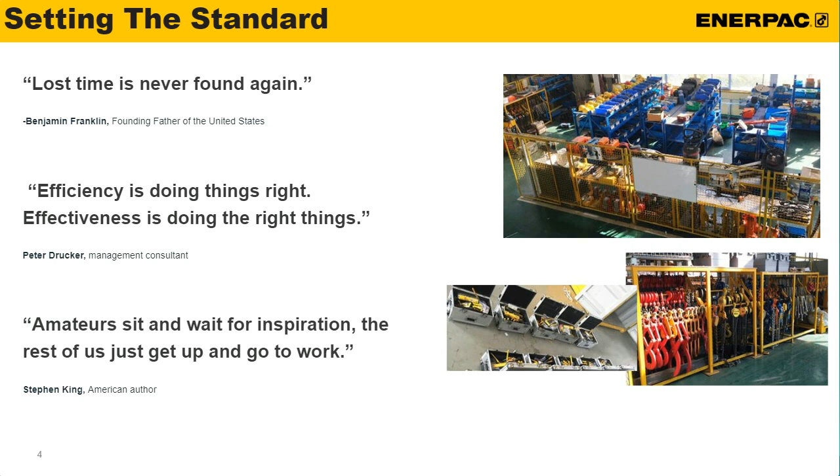We are about getting tools into our hands, getting out into the job site, and keeping all of our assets working in top performance, whether that's in power gen, oil and gas, or general manufacturing or infrastructure. Any of the industries, it's about getting up and going to work. And coming off the pandemic times, we're all leaning into that and looking to progress our industry forward, get back to work, and take care of our assets.

So we're going to start by talking a little bit about the technology trends in industrial tools.

Another thing I like to do in presentations is bring in our consumer lives and try to mate it with our industrial professional lives. As we interact with our day-to-day companies, be it a grocery store, a gas station, or Amazon.com, we feel a day-to-day presence where technology continues to improve, whether that's a phone app, email-based feedback, emailing receipts, tracking numbers for shipments, proof of delivery—all those things we experience every day in our consumer lives, we want to bring into the professional world and apply that efficiency to our industrial tools and how we do business.

We start out with industrial tools that are there to do a specific job, and it started out, as we all know, just getting the job done. Throughout this presentation, most of my background is in bolting—torque tools and tension tools. But I want to be sure we can apply these theories in practice to any industrial tool out there. At Enerpac, we do lots with lifting cylinders, pumps, power packs and things like that. So I'll use bolting tools as a reference, but know that when I talk about innovation and technology, it applies to all industrial tools out there, from Enerpac and any other supplier, as we try to create the best tool experience for you, the end users.

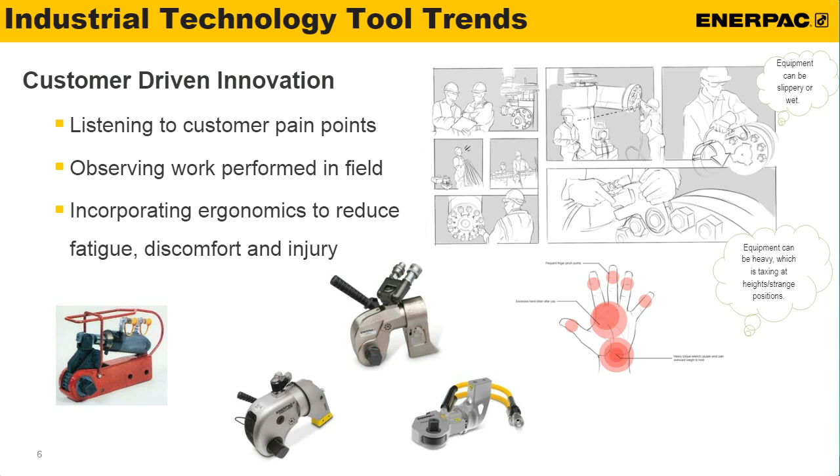Another way we're trying to enhance the use of tools out in the field is this long arcing shift as we go from corded products to cordless products, or said another way, introducing battery tools. Going back to my own consumer life, I remember having a corded drill plugged into the wall to drive stud screws while building barn walls. When battery-powered drills came out from Porter Cable or other large tool companies back in the 90s, it made a huge difference. You weren't lugging around extension cables, you weren't eyeing up the closest outlet, and you had a given runtime. That shift from corded to battery-powered or cordless technology has been tremendous.

Starting on the consumer side, it's absolutely making its way into the industrial world, and Enerpac certainly wants to be a large part of it. We've made battery-powered pumps, hydraulic power units, battery-powered hydraulic torque wrench pumps, and we also have battery-powered cutters for chain cutters.

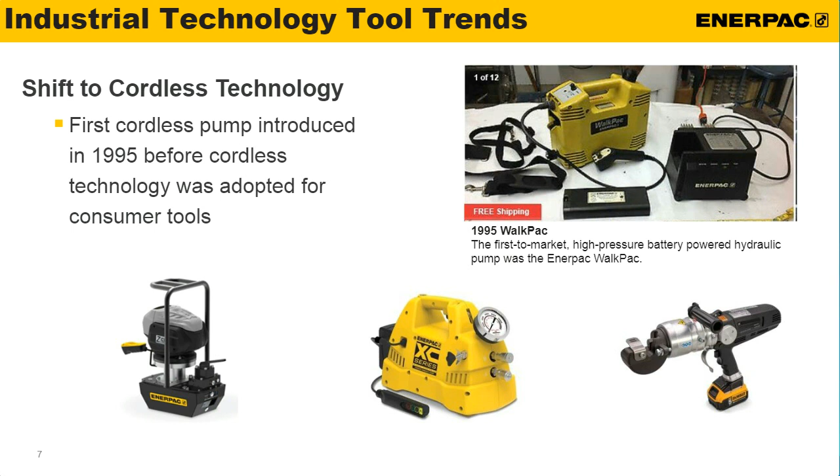Another area where we are innovating and bringing in technology is on the remote control side. We're all used to pendants operating hydraulic pumps—that's been the industry standard for decades. Wireless pendants are slowly starting to take hold, but we have a number of areas where we have to use caution to make sure we don't give up any site performance. We can't have any communication issues or a lost Bluetooth signal in the middle of a job site—there are too many safety risks at hand.

As we move into wireless pendants and more remote control technology, the margin of error is slim. The burden of performance is very high, and we take that at the top of the list as we try to innovate our controls and tools.

In our consumer lives, if you have a cell phone that's Bluetooth into a speaker and it cuts in and out every once in a while, sure, it's a little annoying, but you're still going to enjoy your music with a little interruption. In a high force lifting circumstance where we may be lifting hundreds of tons or controlling 10,000 PSI hydraulic torque tools, we cannot have that miscommunication. We need to make sure that the connectivity is high, consistent, reliable, and that every bit of technology works into that to ensure safe operation on the site.

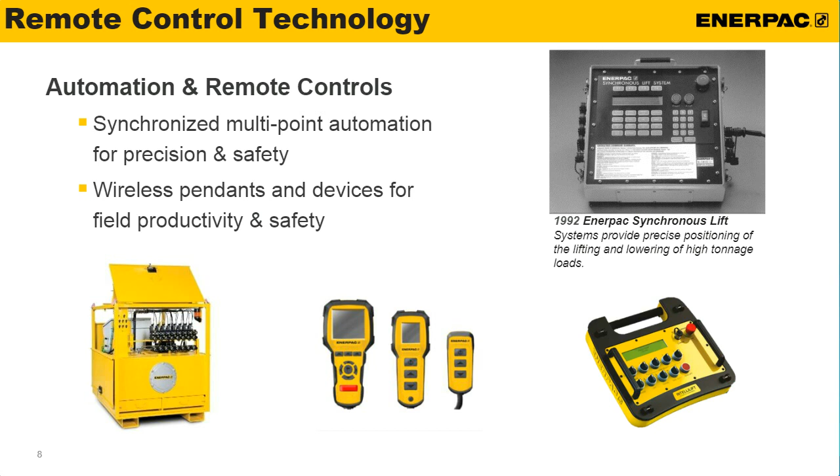Another frontier we've been hearing about in our consumer lives for the last 5 to 10 years is the cloud. Everything gets stored in the cloud, and you have major consumer companies like Amazon, Google, and others creating cloud-based storage. We're absolutely going to be bringing that into the industrial tool space, and it already is there in some capacity. Think of owner's manuals as an easy example of being cloud-based.

We still want to have paper versions available, but having digital copies where we can update and make improvements to our tools over time, over the air, as they say—the OTA side—which they can already do on cars and other types of tools.

As we get into cloud-based technology, there'll be more interface between the end user and the tools you're using, and the documentation we're capturing—whether it's a calibration certificate, a maintenance interval, or a training video. We're going to build all of that technology into the palm of your hands.

The same way you check in for a flight and use the boarding pass on your phone, we want to bring that same convenience and technology into the industrial tool space. Some of this is already available, but we have to be sure we're always innovating and improving.

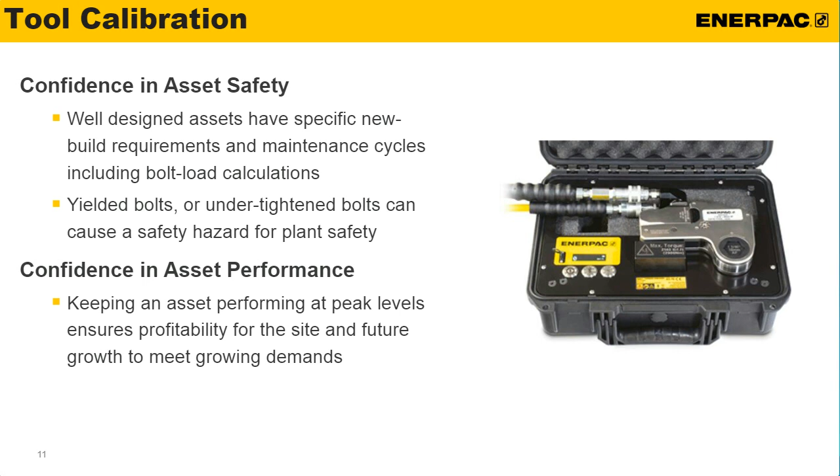So the importance of tool maintenance. This is where I talk about tool availability—the tool is ready to perform the work.

So if you think about a vehicle, we want to be able to walk outside of our house, put the key in the ignition or use the engine start button, and drive to work and go about your day without having to worry about whether the battery's charged, without having to worry about any type of mechanical issues.

So we perform vehicle maintenance. If a vehicle is going to sit for a long period of time, we put it on a battery tender. If we're driving excess miles, we have our oil changes every 5,000 miles or whatever the vehicle is calling for. That's all about maintaining that vehicle so that it gets you to and from work, to and from vacation, to and from family events, when you need it, when you want it.

It is just as important, in fact dollar-wise more important, I would say, to have that same readily available status on all of your maintenance tools.

So if you have pumps that are not available, you're going to have to purchase more pumps to create the availability by having excess pumps. Whereas if we can get these industrial tools into a regular maintenance cycle—and that's going to vary dramatically between what the tool is, how the tool is used, and in what environment the tool is used—that will set the rhythm for what the proper tool maintenance is going to be.

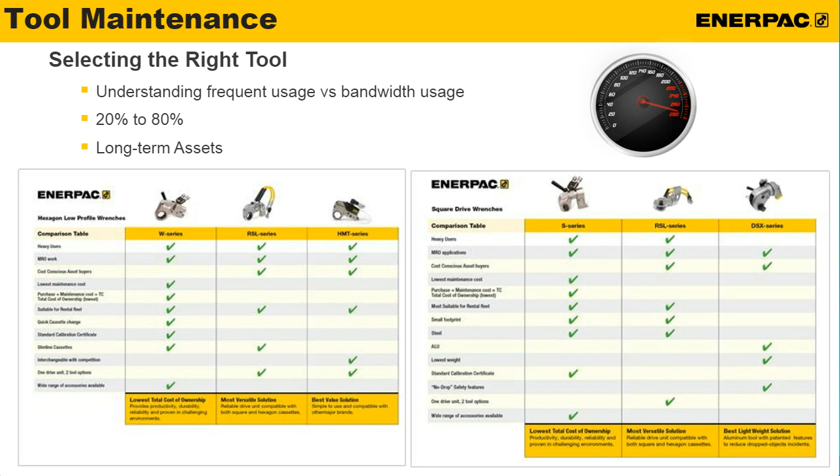This ties back into calibration and ongoing checks. The standard practice in the torque wrench world is that every 5,000 cycles or every 12 months, whichever comes first, you want to make sure that tool gets calibrated. Not only do we want to make sure that tool always performs safely, we want to make sure it's giving you the output that it was designed to do, and the best way to do that is annual calibration or every 5,000 cycles. If you're in a heavy use environment, you may be calibrating that tool every 6 months or every 3 months. It's very important to track the usage of that tool to set the calibration standard that will best serve it.

So you can get it into a qualified tool calibration company. Enerpac is certainly one of them, and there are other tool manufacturers that offer calibrations. Work closely with them, understand exactly what you want to set for a maintenance interval and a calibration interval, and make sure that tool is doing exactly what you want.

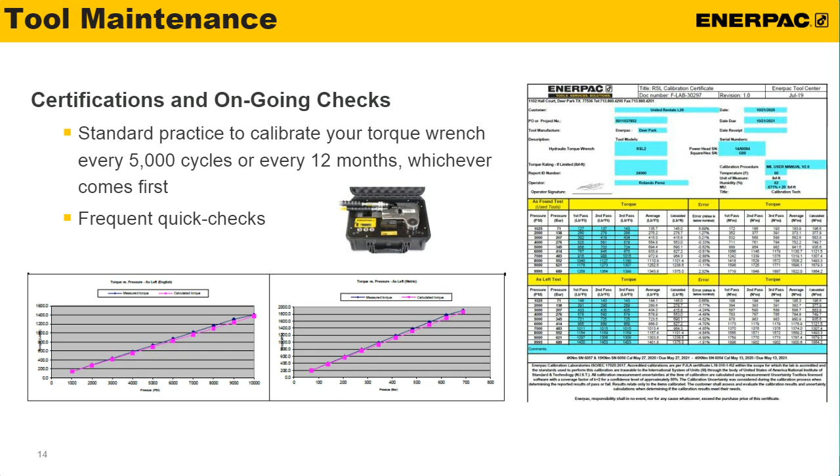And then we circle back to that cloud-based point I was bringing up earlier. Part of maintaining those tools and making sure you have good calibration and maintenance cycles is keeping track of that data, making sure calibration certificates are readily available and located in a central location. The best way to do that today, just like Amazon and other companies we use in our day-to-day lives, is to make it cloud-based. We have a partner, a sister company over in the UK called the HTL Group. They're servicing the North Sea for torque and tension tools, and they have great software called iCalibrate.

And that's to store these documentations where you can actually scan a tool and save a document to the cloud, and then access it for any of your tool fleet managers. It's a great piece of software. We're looking to bring that to a global scale at Enerpac, and I know other tool manufacturers are certainly working on cloud-based offerings, and they have versions out there already.

But to my point I brought up earlier, especially in our industry where we have high forces and large assets involved, we have to make sure our data is iron tight. It's a little different if your Amazon package gets delivered to the neighbor next door - they can fix that within the app. It's very different in our industry to have real watertight technology that is user friendly, connected, has great traceability, and is able to improve your tool fleet experience and your tool management.

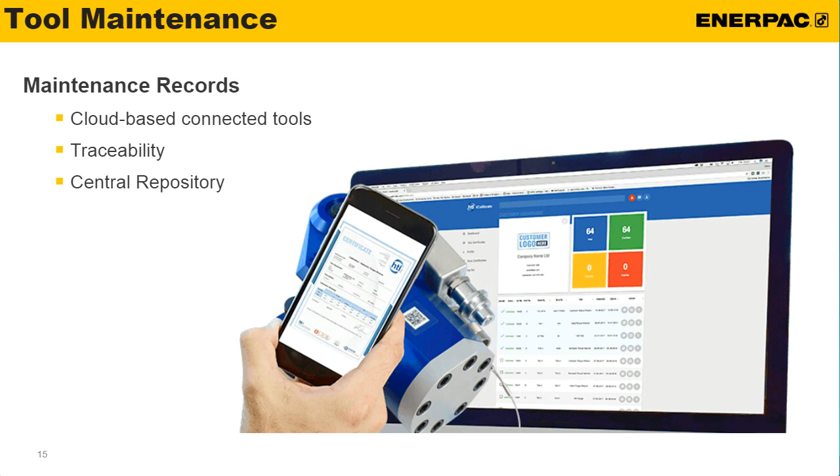And another piece that we have in tool management and tool fleet is joint integrity, and this is kind of where it ties it all together. So I've got just about 1 minute of a video that I wanted to share with you guys from our joint integrity team that many of you end users are familiar with. This is where the tool fleet management, where the rubber hits the road, where when you need to bolt together a flange and need to get gasket compression perfected so you have a no leak startup - that is all tied to the joint integrity world.

So I'll play a video here. It's 6 or 7 minutes in total. I won't be playing the whole video for you. It is available - we'll have it in related content. And you can also email me if you'd like, and I can get you access to the video. But I just wanted to share with you some of the usage side of the tools. So we'll get the video playing here in just a moment.

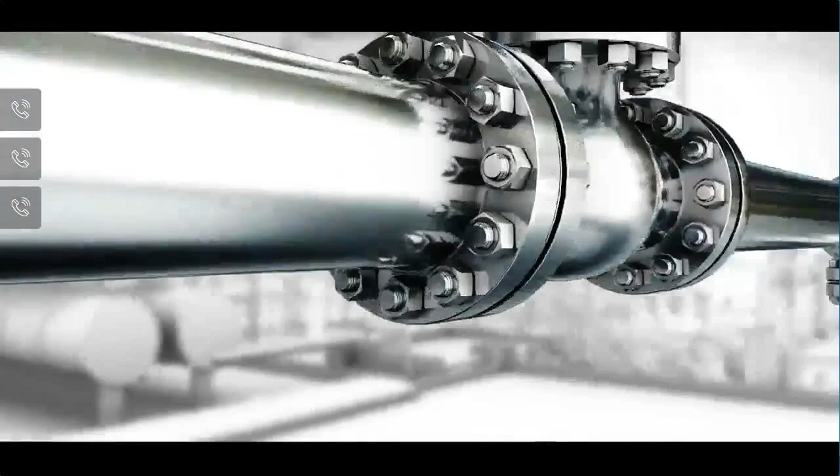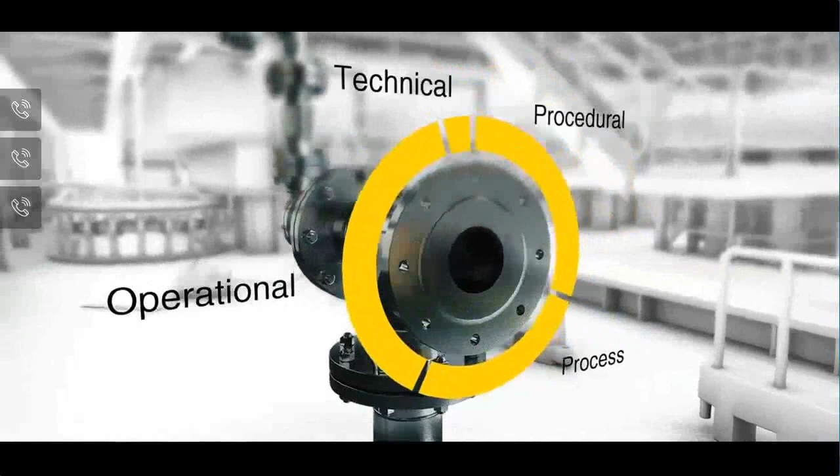Every single leak has a negative impact and incurs a cost to your business. Leaks delay startups, cause unplanned shutdowns, adversely affect the brand image of your company, your operations, the safety of your staff, and they can have significant environmental impact. The total accumulated value of the 100 largest losses in the hydrocarbon industry as a result of leaks is over $33 billion. Furthermore, the American Society of Mechanical Engineers states that leaks from bolted joints equate to losses of over $100 million annually. But all leaks can be prevented, and with our track record, we at Hydratight have proved it. Our joint integrity program results in the lowest cost, leak-free solutions for your plant, helping projects remain on schedule and on budget, eliminating rework and multiple tests, and providing safe and reliable operations using fully traceable solutions delivered to the best industry standards. Industry studies show that the majority of flange leaks are attributable to procedural, process, or operational failings. Surprisingly few are as a result of technical issues. Fundamentally, it is people and their competencies that prevent leaks. As a measure of our technical credibility, Hydratight became the world's first ASME PCC1 qualifying organization, certified by Lloyd's Register Energy.

All right, excellent. Just wanted to show a little bit of that animation and the tools in there. And I believe it directly applies to what this webinar is all about, which is keeping good controls, good practices around that tool side of things.

Everything that video was talking about with joint integrity is only possible when the tools are well calibrated, well performing, well maintained, and of course, I say it all the time, readily available. That's a very important piece of tool fleet management. The finance team always likes me to add that nod, because of course, if we aren't able to maintain our tools well, the tools are being overworked because it may not be quite the right tool for the job.

To maintain and keep that tool green tagged, as I call it, or readily available, simply means we have to purchase more assets and tools to keep the availability high, and that may not be the right solution. In fact, I'd argue it's much better to perfect your tool list, update it as new technology and better ergonomics come in, and let that provide a better tool experience for end users, safely performing day in, day out.

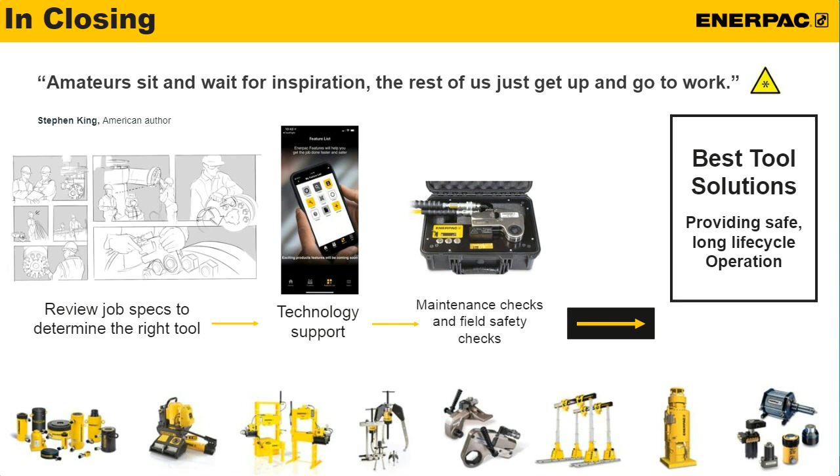Okay, so we've got our first question in. What is your calibration standard followed for Enerpac torque tools?

Great question. We're in line with the industry standard, which is 5,000 cycles or 12 months, but it heavily depends on your job site needs. When you purchase a new S, W, RSL, or HMT torque wrench, it will come out of the box stating 5,000 cycles or 12 months. That's what we start with. Once we work with your job site and the end user's needs, we may refine that to a shorter window. In rare circumstances we'd extend it, but for the most part we stick to that industry standard of 5,000 cycles or 12 months. Thank you for that question.